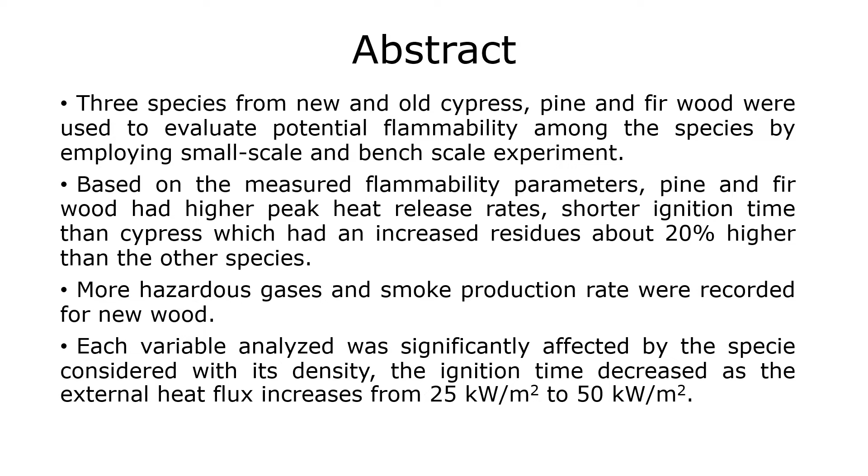Introduction. Wood is considered one of the oldest and most important building materials, and as a standard renewable, sustainable resource in construction. Architects around the world are increasingly using wood for construction and manufacturing of furniture, wall decors, paneling, roofing, and so on. Wood in any form, either fresh or old, is used in various applications, having remarkable properties such as small bulk density, low thermal conductivity, good mechanical property, etc.

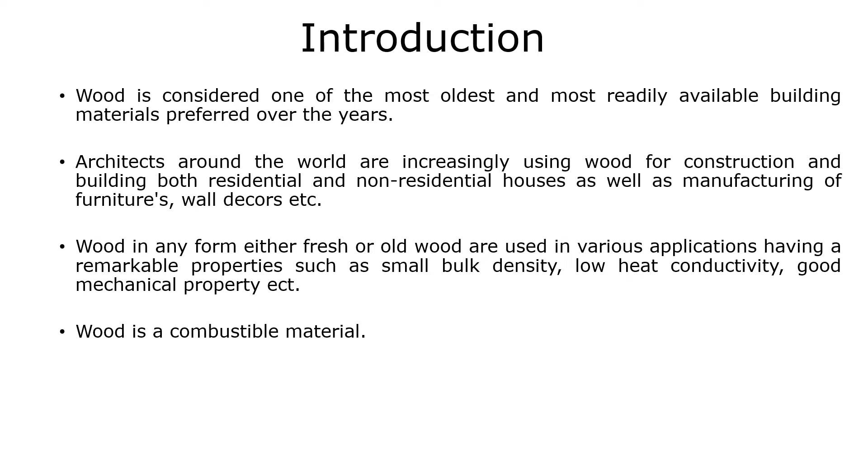However, wood is a combustible material. With its inherent flammability, it poses fire risks which may lead to injuries, accidents, loss of life, properties, and so on. With its vast benefits, there is therefore the need to conduct flammability studies to improve the fire safety of the wood material.

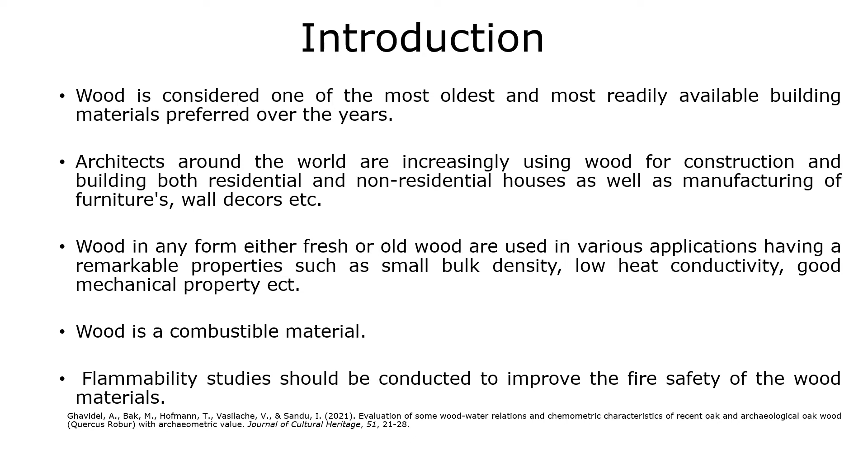Methods. The fire risk of flammables is a key factor in effectively evaluating combustion performance for materials exposed to fire conditions and can be evaluated by ignition time, heat release rate, mass loss rate, speed of propagation, hazardous gases, etc. In this experiment, 3 species of wood were selected: cypress, pine, and fir for comparative studies. Among them are new and old wood.

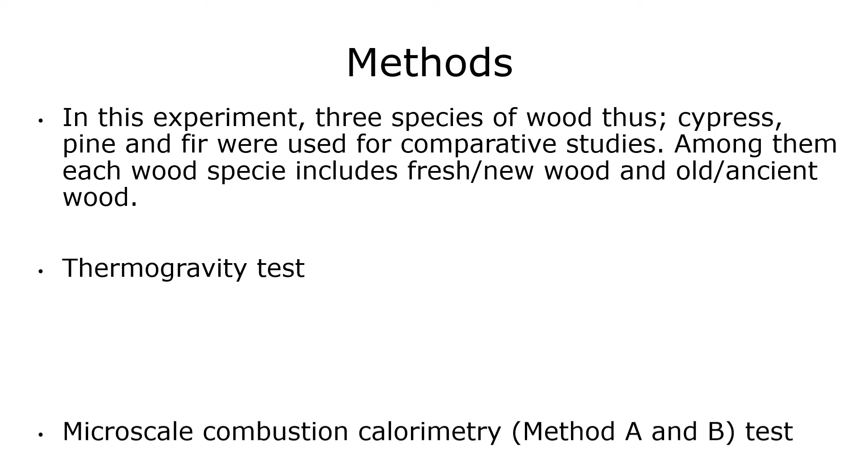There are many techniques to measure flammability parameters. In this experiment, thermogravimetric test and microscale combustion calorimetry for both method A and B were employed. Cone calorimetry test was also considered. The thermogravimetric test is used to study the thermal stability of the wood material. The microscale combustion calorimetry is used to evaluate the heat release rate, peak temperature, time, char yield, etc. The cone calorimetry test is used to determine parameters such as ignition time, heat release rate, mass loss, and other properties relevant to fire characteristics. All the methods comply with standard protocols.

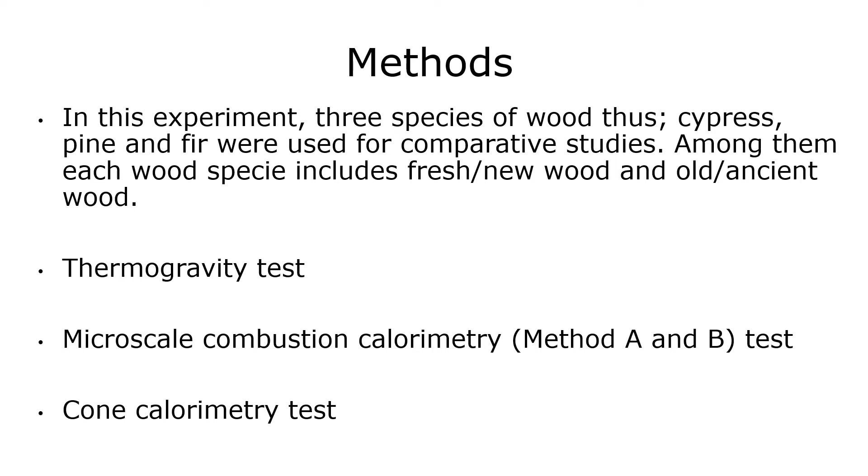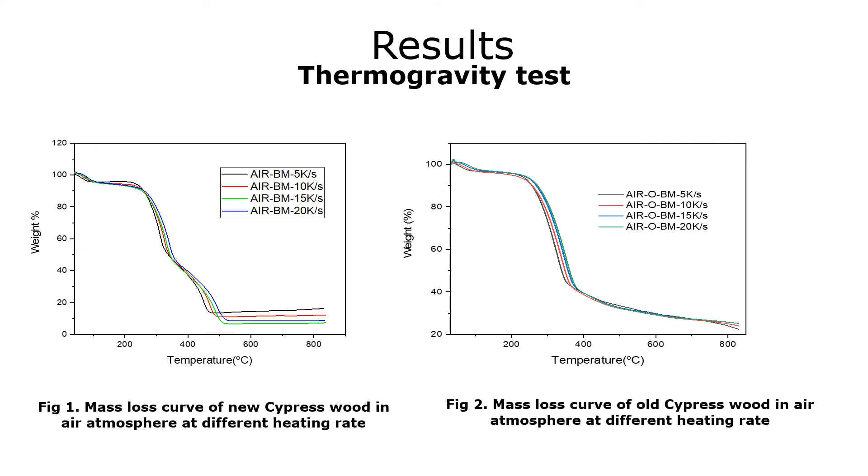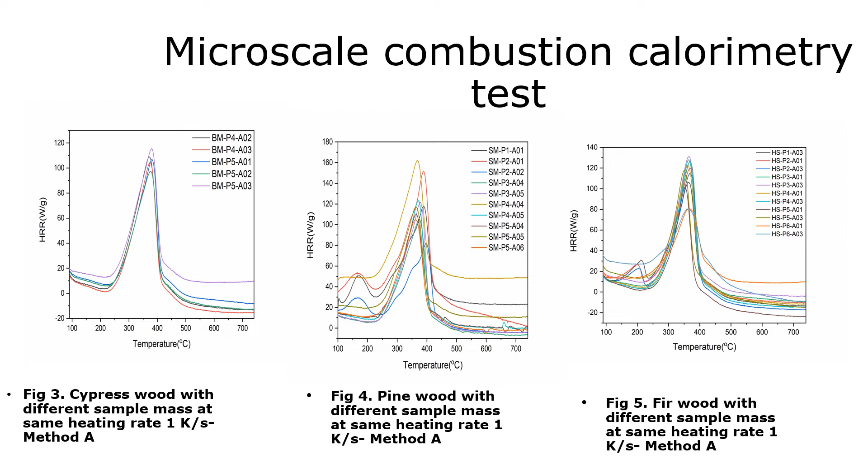Microscale combustion calorimetry test. The heat release rate curves in Figures 3, 4, 5 with different sample mass at the same heating rate exhibited a typical shape expected for the wood samples. In Method A, a single peak is shown for the samples. It is evident that, although each species group follows the same general shape, differences can be observed with regards to the peak height, width, and the temperature at which they occur. For example, cypress wood has the lowest heat release rate value recorded at 118, followed by fir wood, and pine recorded the highest peak heat release rate, depicting high flammability.

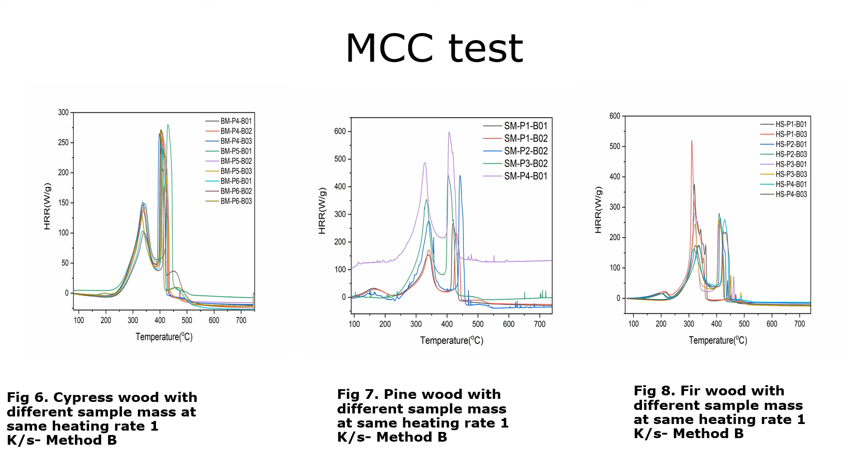It was seen that the new wood had an increase in average carbon monoxide and carbon dioxide yields, which may be attributed to moisture content of the sample. As the external heat flux increases, the residue percentage also decreases.

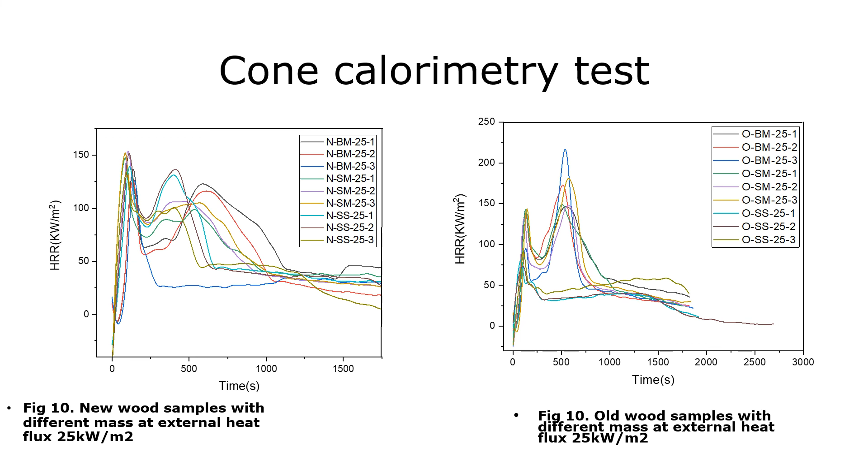Conclusion: the properties of different species of new and old wood were obtained. TGA analysis in air environment was slightly lower than in nitrogen environment for cypress wood. MCC experiments in Method B showed significantly higher peaks of heat release rate than in Method A. In the cone calorimetry test, the results show that the differences in densities and the type of wood resulted in significant variations in flammability parameters. Again, there was a slight improvement observed in time to ignition and low heat release rate for cypress wood.